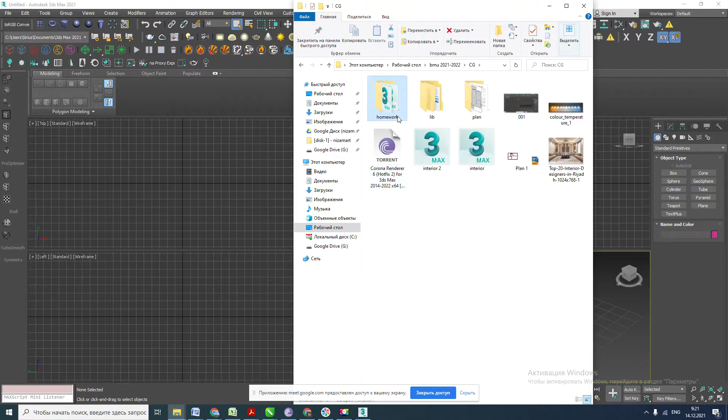Like this, you see, I drag and drop here, and I can open the X-ray. Actually, I never use this one, I use this method. Mesh and X-ray is actually...

I just drag and drop.

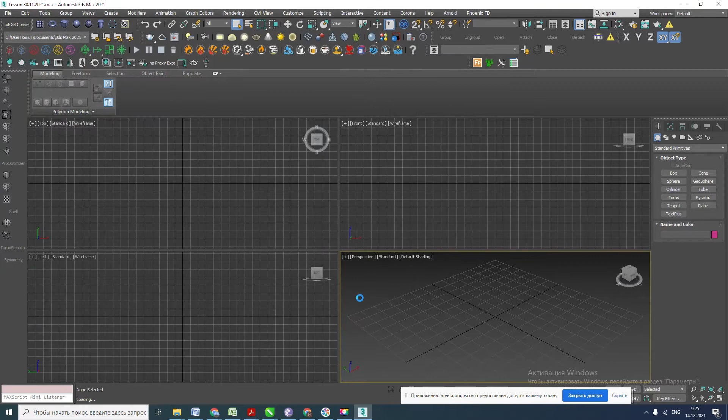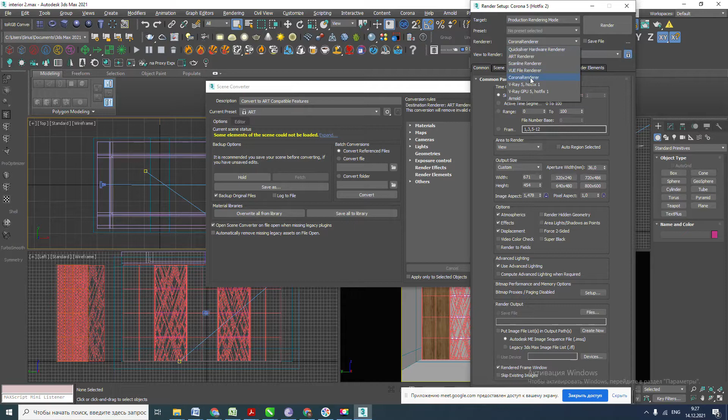You may close this window. What does it want? It wants to convert your materials into ART materials by default. And this item, see, you may convert into another render engines, but I never do it, because if I work with Corona or V-Ray, I don't need to convert.

Let's continue our material. Here's our file, via image. Okay.

What do we do next? What I want to show you is the lighting. Let's take a look at our ceiling. As you see, we have different lighting systems on the ceiling.

Let me show you. First, let's go to Google. I'll show you.

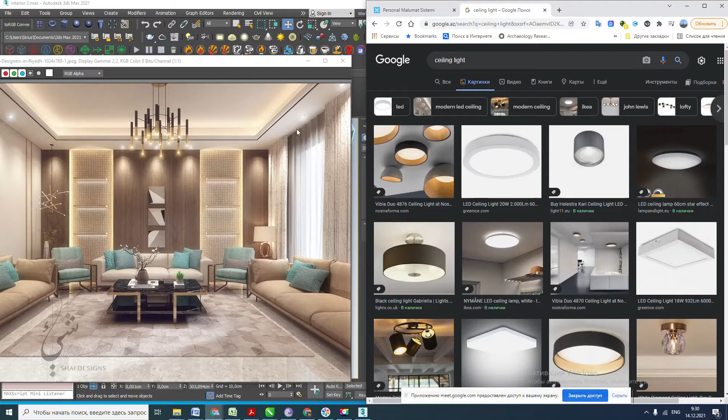You may download spots from the internet or just create for a while, but I always use downloaded spots, downloaded lighting, because if you create something, of course it will work. But if you do a real project, you need to use real objects from real customers. Okay.

As for ceiling lights, we'll create, for example, something like this. You may download it, but I'll show you how to create it. It's very easy actually, nothing so hard to do. You know how to do this.

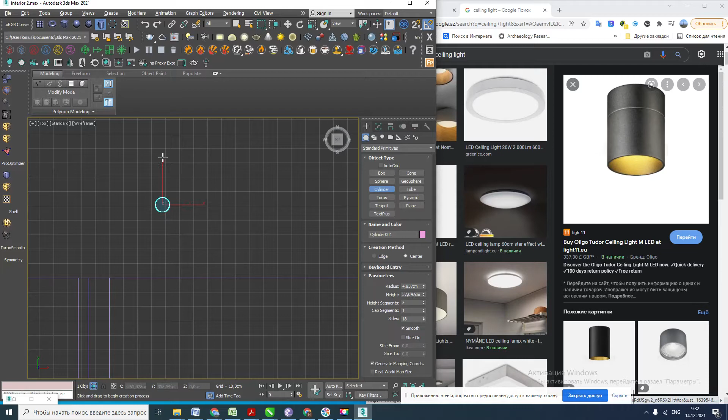It's very easy, you need to go to the tube or to the cylinder. I'll do it using a cylinder. Just create a cylinder.

And if you want to know all you need to do, if you want to know the dimensions — 1.2, the dimensions, the diameter means 6 centimeters, maybe.

Why am I creating the light? Let's imagine that you have some library, for example, from Archimedes. This is the catalog of different objects. For example, you see a lot of objects from Archimedes — electronics, audio video systems, phones, and so on, a lot of things.

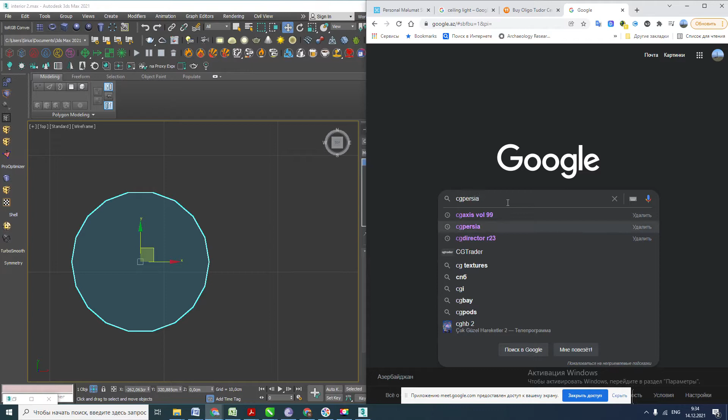I have this collection, for example, like this, so you may download it. And on the other hand, you have collections from, for example, CGAxis. This is also a collection of 3D models, maps, materials, and so on. You may, of course, buy a collection and use it in your projects.

But let's imagine that your customer wants to see, for example, the lighting or some furniture, some detail of his interior, and he wants to buy this light from this site — this company's product, for example — and you don't have any 3D model of this object. It's very expensive, but let's imagine.

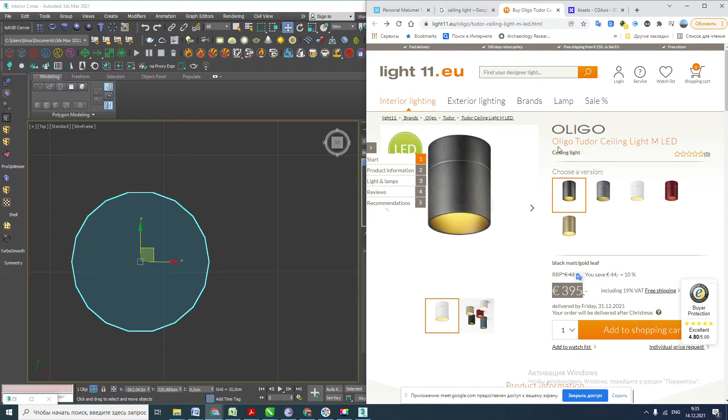What will you do, what do you need to do? Of course, you will need to go to the internet and type this object's name, find his page. Here we have his data sheet. We can take a look. Where is it?

We'll say the same thing, we'll have the descriptions of the model of this object. Here we know it's 1.4, 114, and 6 in radius, diameter 120. Okay, this is our object, and now we can do it.

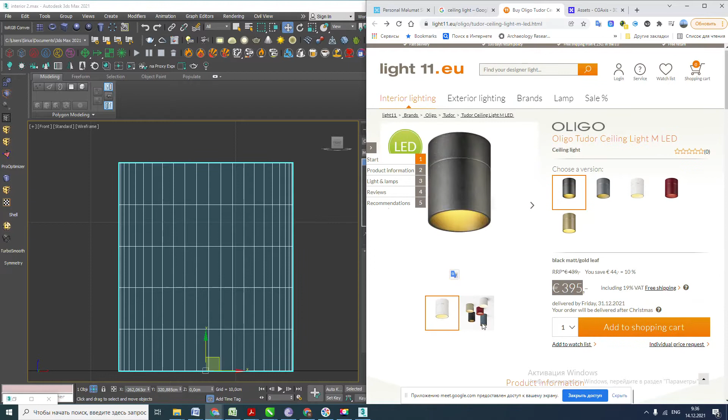We can add some details, for example, how to add this line. And here we have different colors of the light — we'll change it, different properties. How do we do this?

I'll rename this into Oligo Tudor, and I always write here 'spot' or 'light' or something like this to understand where it's situated.

And of course, I'll add it into my new layer. I create a new layer by pressing this tab, or I go to toggle layer explorer. See, this is my spot, this is my object that I created and selected. I can press this button, create new layer, rename it into like this.

Okay, and I'm in the lights layer. Let's go here, the cylinder. We can rename it.

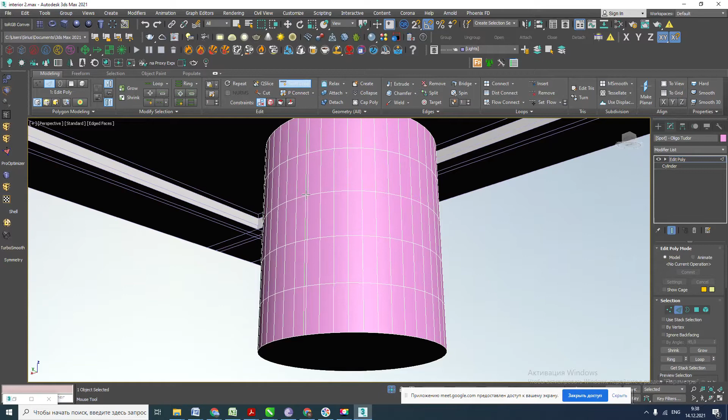No, I don't do it actually. We go to editable poly. Okay, and now I will add some details. What I will do, I need some stripe here. That's why I go to swift loop here, add some loop.

Let's see, let's take a look. Here, somewhere here. Maybe I will go to the vertex one, press 1, go here. That's okay. Now I'll add some details.

I go to polygons, select 2 polygons, two neighbor polygons, and now press loop. Then I go to the inset mode, and just inset a little bit. See,

0.01. Yeah, maybe it's enough. Okay. Yeah.

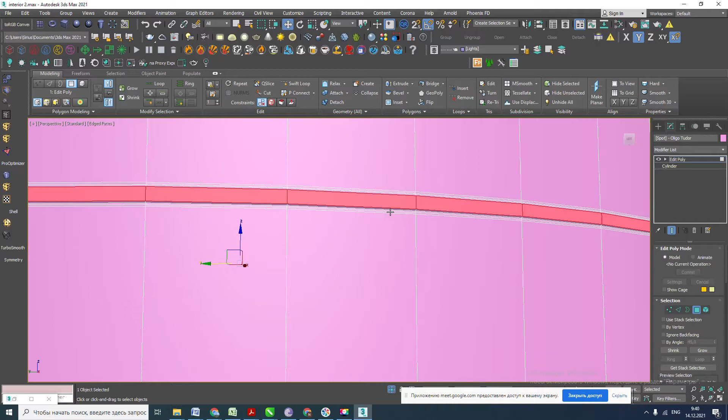Then I'll add a new loop here and here. Then I'll loop again, maybe bevel a little bit. No, opposite side. Okay, and here this I will also bevel to the opposite side with the negative value.

Okay, now I have some striping. As it's in the model, now I need to add some, go to

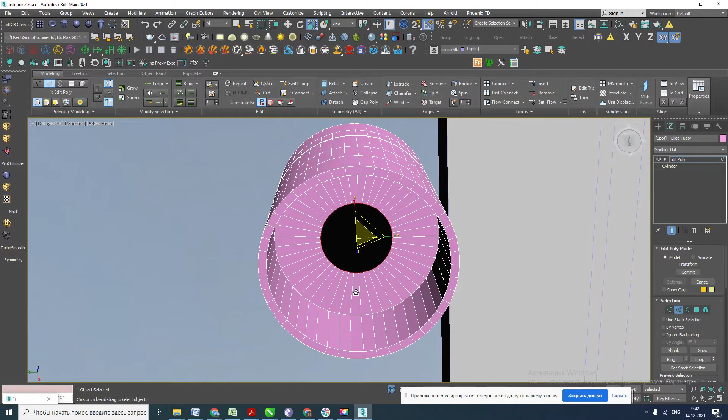Scale mode. Press Shift and drag and drop. I created new. The sides of an object. Maybe it's and that goes to press with Shift. I create this one. Go to Shift. And here you are. Now go here. And also press Shift. Yeah. And I can close with cap. It doesn't work. Wait. Doesn't matter.

Okay, here I will put another object, another detail. But I can do it by selecting. Maybe no, I'll just create a new one, a new cylinder.

And let me show you how to put it into his center, how to put his pivot point into the center of his pivot point. You know, pivot point affects pivot only. His pivot point. Yeah, I centered the object. It has already been centered. Now here, I make sure that it's in the center.

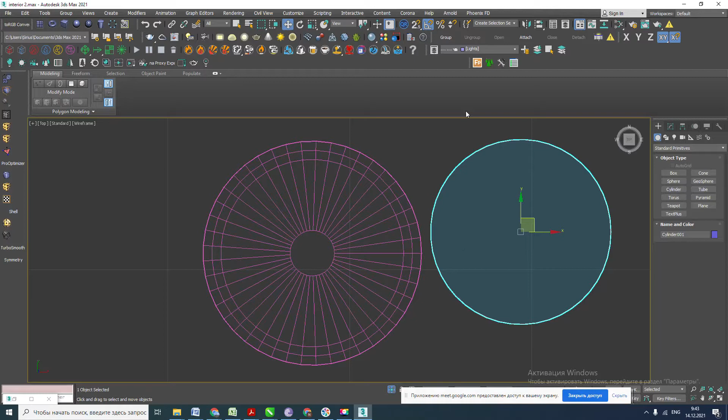Okay, very good. And now I'll go and align by the pivot point. You see how I did it? I select this object, go to align. We have different types, but it doesn't matter for today, for now. I just select this object that I want to be aligned. I go to align and just drag the object into this object and it's aligned into this object, centered into this object.

Okay, now this will be our element. Now I want to show you how it works actually. First, what you can do, let's imagine that this is a glass object, glass surface.

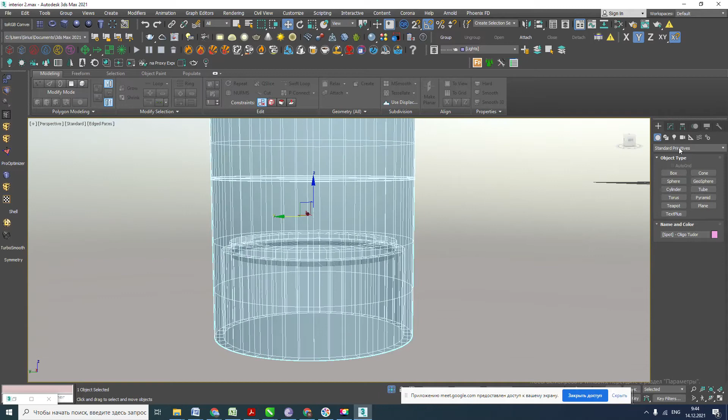Let me delete these points here and just drag out. Let's imagine that we have a glass surface and we have some, let's create corona light, sphere for example. I create a sphere here and put it into somewhere in the center. Let's imagine that we have some light source in the center of this object, and it generates lighting

and go through the glass, and then it works like this. That's the first method how to do your lighting, but I don't use it because the calculation of this may have some time. Why? Because the light goes through the glass and it needs some time to calculate. Nobody uses this method.

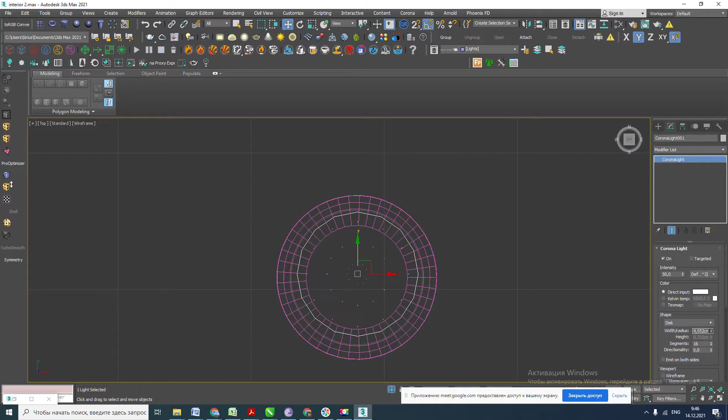That's why I go to the corona light that I created and I change my mode shape into disk. Let's say from the top, and of course I will squeeze size and also align by the center. Yes, I aligned. Okay, and now I just adjust the size.

Maybe I will push up this a little bit higher. This is my glass. This is my light. Okay, and let's go.

And let's go to the parameter to look at the parameters. Here you see 800 lumens intensity. Yeah, because I will change the name of the light. I will just copy Oligo Tudor light, the name of course, and copy it here. And right here. Light source.

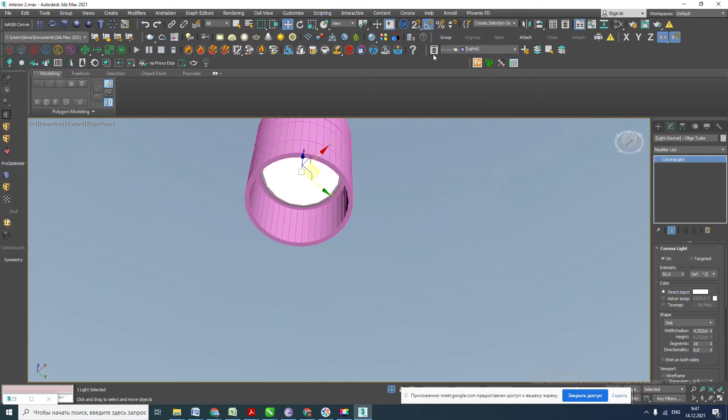I'll rename this cylinder that I created, like a glass surface. Just rename it, Spot to the glass. And I can group it together and call it the group.

Now everything works fine. We have a group of objects and it's fine. You can even add the light source into the group. How to do this? I just select this light source, and group attach to the instance, to the current group.

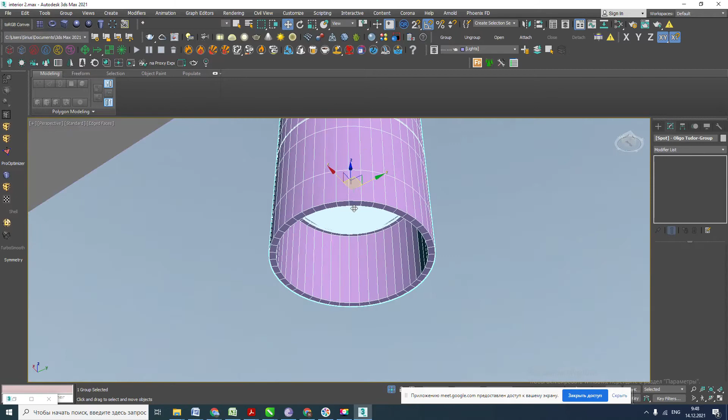And how to work with part of the group? I just open it, not ungroup, just open and select the part of the group and the member that I want to work with. I go to the person, to his parameters, the existing light parameters.

Light flux is 800 lumens. I go here and change the lumens, right here, 800. 800 lumen is approximately equivalent to the luminous flux of a 16 watt bulb. For example, if we go to watts, it will be approximately 16, as was told in the description.

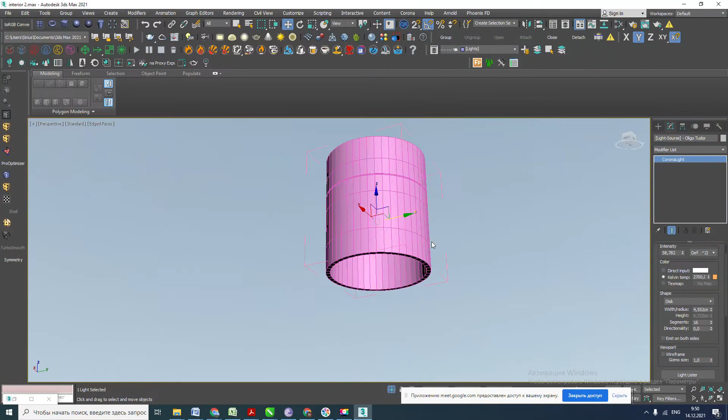Then we need to find the Kelvin, it's 2,400 to 2,700. Where is our Kelvin? Here. Okay, very good.

Now we can close it and put it in his position, where it is - it depends on us. Here we see 3 spots. It depends on our design and our composition.

Now let's have some material. I just open, go to my material editor, material library, I'm sorry.

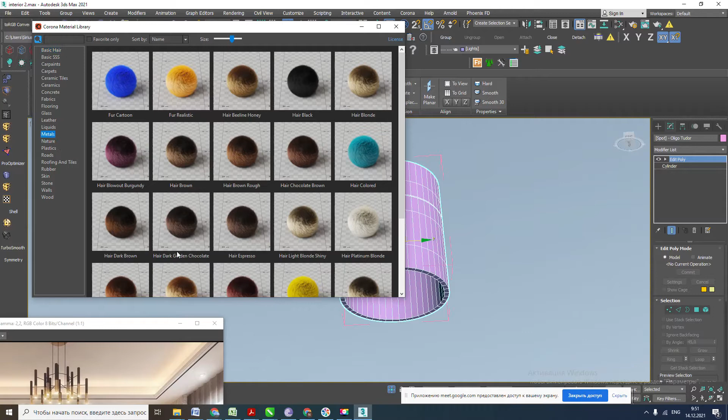Let's take a look, what material is it? White, maybe it's aluminum or some metal, or it is painted metal. Let's go to metal and see aluminum, assign to the model, and here I also will change the material, my glass.

I go to glass material and just select clear glass, assign to select object. Now I can just close. Okay, I created my first object.

And now I need to put it into this position. Where is it? Here we see that they use 3 light sources. It depends on our composition. We can also use 3 or maybe 2.

In this case I don't need a copy because I will not change the copied object. If I need to make changes, I will do it with the object I created the first time. That's why I need to make an instance, and it will save the memory of my computer.

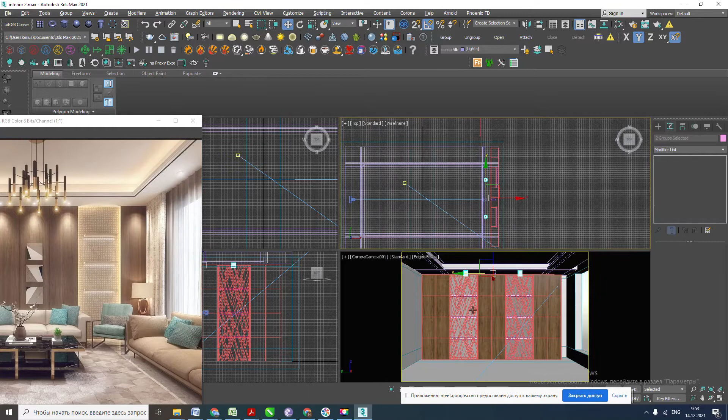Okay, let's do it correctly, and now we can take a look at the result, what happened with our interior using only these two lights. We'll save it, and go to the render panel and start to render.

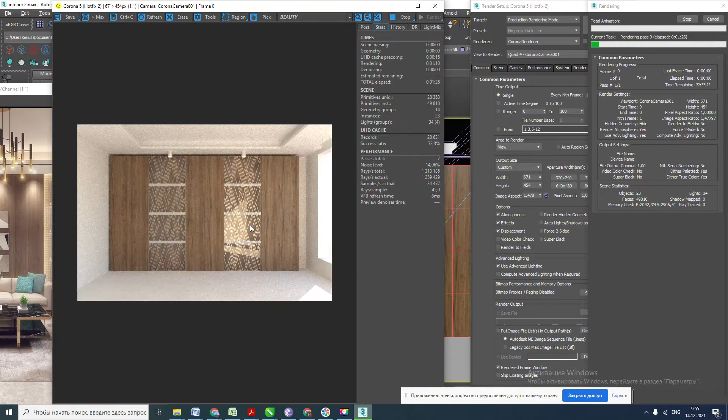As you see, ladies and gentlemen, it works. But of course, the daylight from the sun is overlapping the light that we have in the spot. Let's stop it and let's turn the light source.

Let's do it like an evening light, an evening sun. You can just start interactive render. Now we can notice that it works. Just turn the noise off.

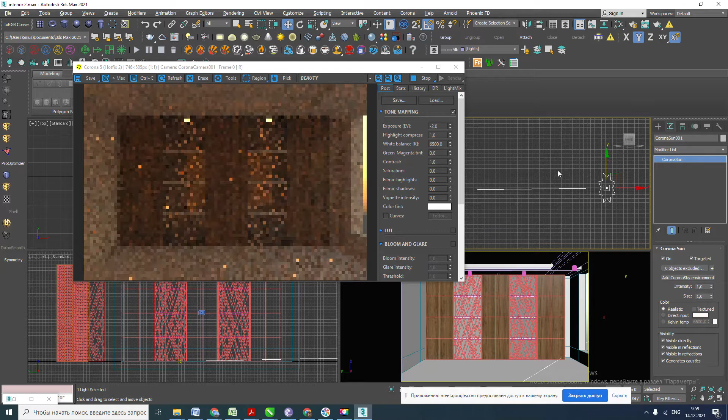But if I just copy here, instance and instance somewhere, on the walls here and also here, put it to the center, copy it also here. Now I can notice that my scene became brighter, and if I even change the parameter of the sun, it depends on the angle of the sun. We have a very beautiful evening, and these lights are very weak.

If we go to degree 0, we see that they are working. I turn off the sun and it works. You see?

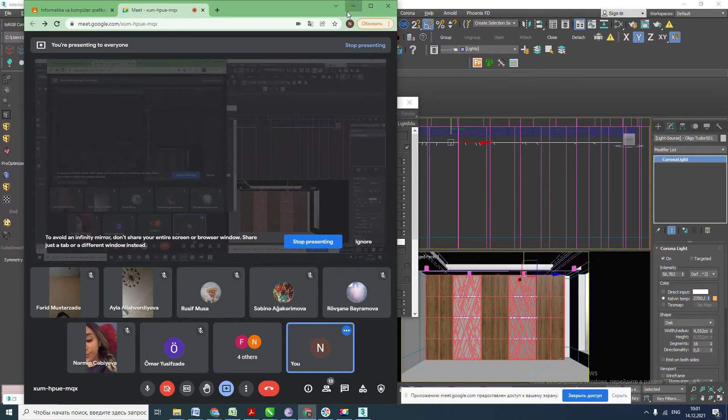Let's see, the system is loading because I'm rendering right now. I go to the dispatch - this is the task manager. As you see, I have a lot of windows open in Chrome. I have Corel with hard files open, and also torrent, and I'm recording right now, also 3ds Max.

As you see, it's almost full. Okay, let's stop it and go to the other light, ceiling mounted ceiling light, LED.

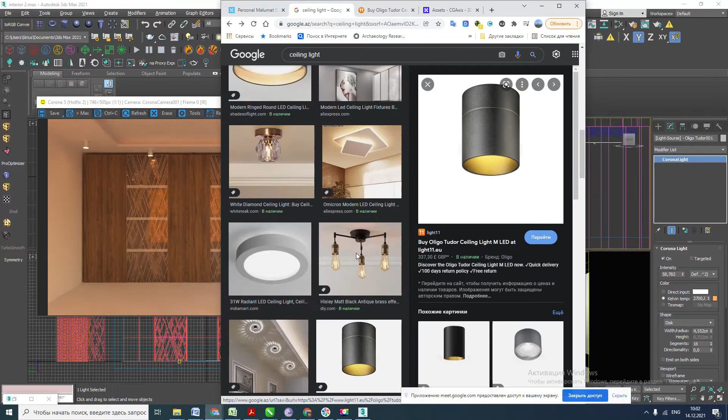Okay, we already did this, sorry, I forgot about this. Oligo, we use this light. Okay, if you see that you have very...

Let's say warm colors, very yellowish colors, you can change the white balance, for example, to 4,500, and you will get much more cold colors. See, that's much more interesting.

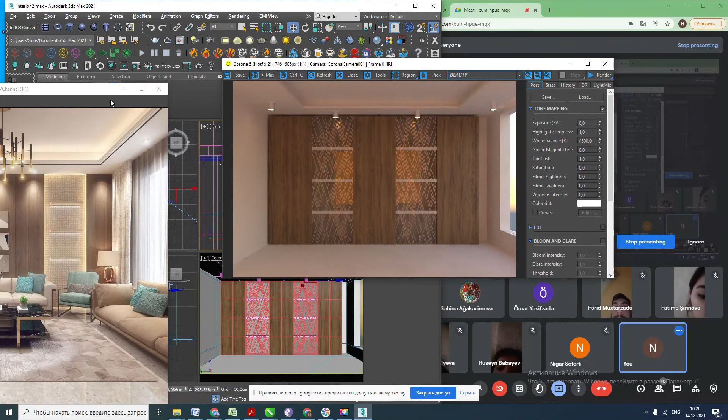Okay, we created the light sources. Now let's talk about the hidden light. You see, we have a hidden light here. Also here, I can show you. Here we have a hidden light. Okay, you see a hidden light.

Also used not only on the ceilings. And if we go to hidden light properties, for example...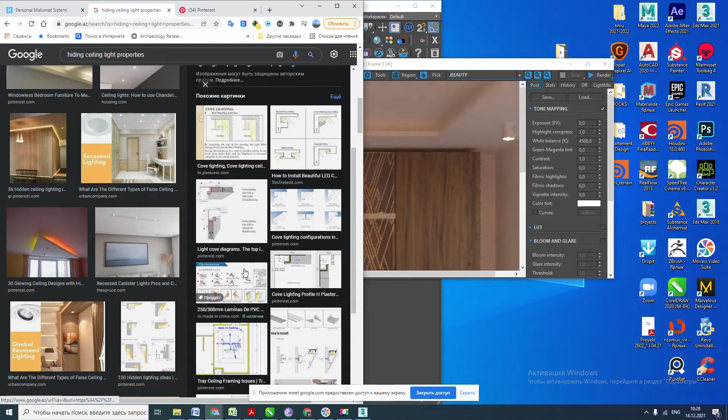That's what you see. First, we can put LED light here. Actually, just a moment, let me show you LED lights. Hidden light, ceiling light, properties, LED light.

Actually, yeah, something like this. You see, we have a LED. Let me show you like this. Okay, yeah, something like this. We have a stripe with LED light, and it's been put here or here in a different position. In our case, we can put it either here or here. Okay, let's see.

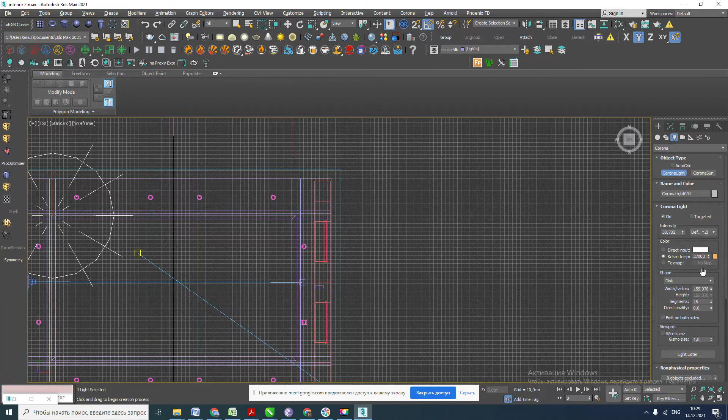What I will do? We have different ways to do this. The first is just create light, Corona light, and just create. Oops, we are in this shape. I will change it to rectangle. Create it again. Okay, I created the light.

Okay, go to the perspective view, and maybe I'll select both the light and the ceiling, and just isolate by isolate selection, or Alt Q. Okay, I isolated the selection.

Okay, I put it here. Now I need to correct it. I need to get some corrections. The width will be 5 centimeters, or you can go and check parameters.

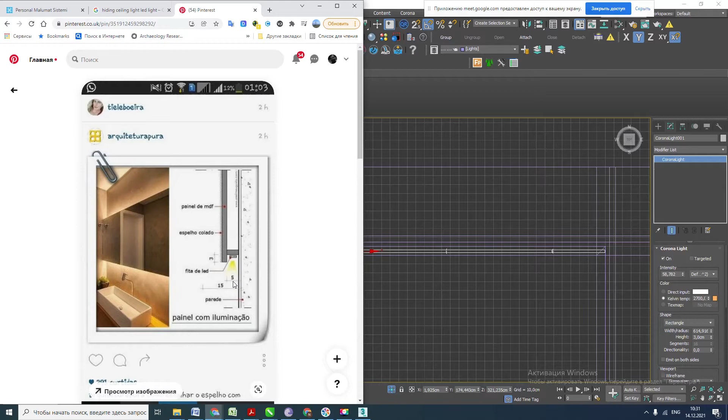Okay, now we put it either like rotated. Okay, I can put it like this. Yeah, like in ours. You see, I put it here on a corner, or here on this wall. But I will do it like this.

Okay, what about the length? It's okay, it's up to our tray, maybe 620. Yeah, good. So I'll copy it, now I instance it. Okay, let's rename, let's write...

Fake light or hidden light, hidden light ceiling, and now here I will add just like in brackets, rectangular brackets. I usually write some category, like I create a folder, then the name of a file. Let's imagine like this. Okay, hidden light ceiling.

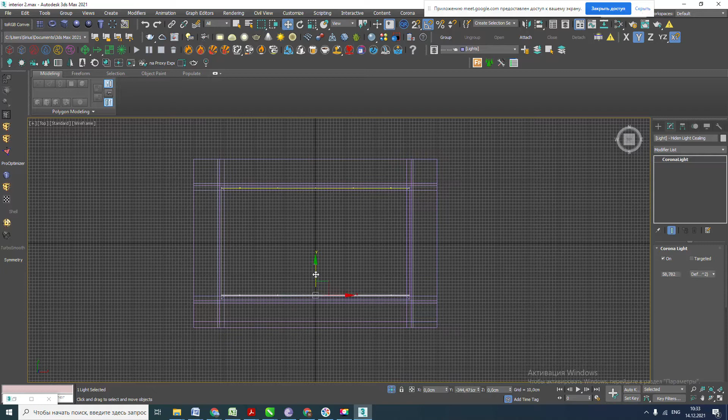Then I copy it here, instance, and now hidden light 001, maybe, could be. Now let me make sure that it's the correct position. Now I go to the top view and I copy it, copy the instance, and I rotate it and put it into this position, and of course I will go to select and uniform scale.

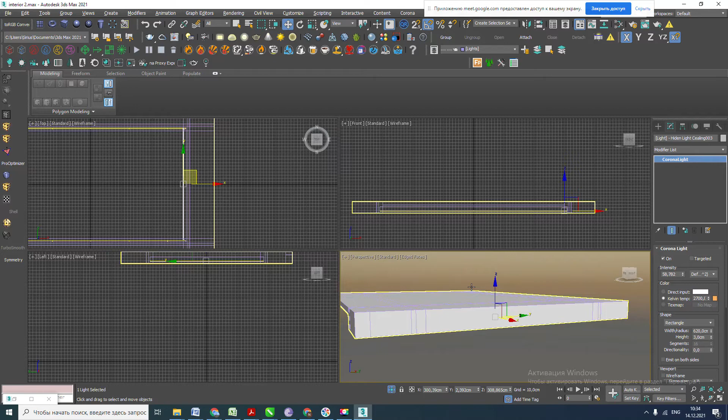I'll change its sizes. Okay, I can do it here, but I just scaled it. Make sure that it's in the correct position. Also, I copied instances there. Why do I instance it? Because if I change a parameter of one of them, the other will change automatically.

And let's select our lights and put them on a surface, very close to the surface. Okay, now I can change the intensity of my light. It's 58. If you don't know, you can go and check LED light parameters, and you will see the intensity of LED light, for example.

What is this? No. One candle, and we will find somewhere. Actually, it doesn't matter, we can find it anywhere we want. Yeah, for example, different types, for around 4000 Kelvin, that's right here.

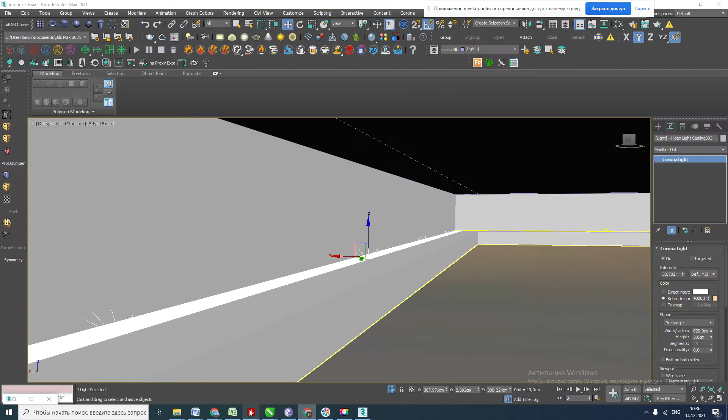In our photo reference, we have something like 3000, maybe 3.5. The spots are cold, the light from the spots is cold. The light from the ceiling is warm, but it doesn't matter for this experiment because we choose Corona light. Okay, and what about the intensity?

Yeah, I will copy it. I'll save it for you.

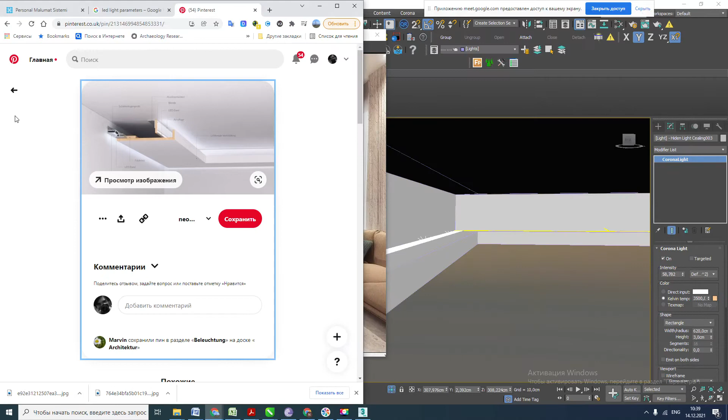Okay, let's take a look what happens with our render if we render.

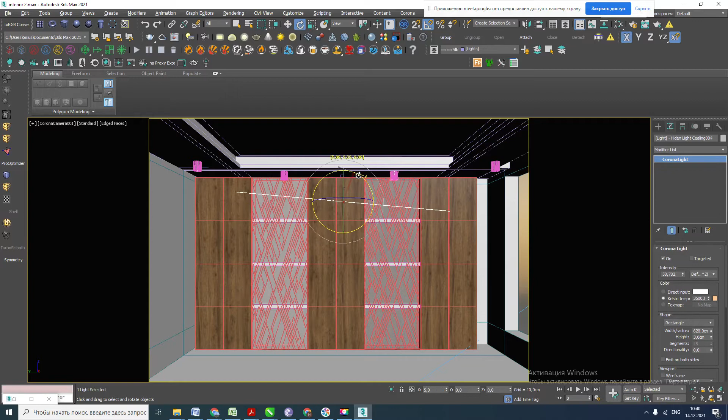In our photo reference, we have light here and here. Let's create a linear light also. I copy it here and I will put it into this tray. Do you remember we created the trays here for our lighting?

I put it here, let me isolate the object. I put the lighting here. Of course I'll change the sizes. If I change the sizes from here, the sizes of other light on our ceiling will be changed too. That's why I just change the form, I rescale it.

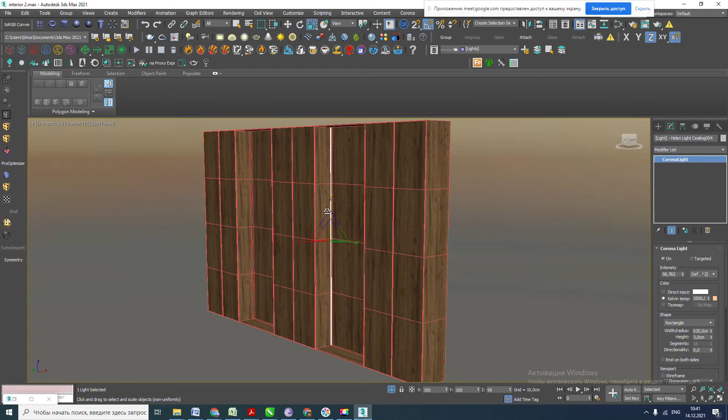Okay. I can put some glass material, but I don't need it.

I can group it. Group 1. Select group 2, the second group. Okay, very good, you can close it. And let's take a look, let's take a look at the results.

I save it and just press render. Let's stop it because I want to increase the resolution, it's very low now.

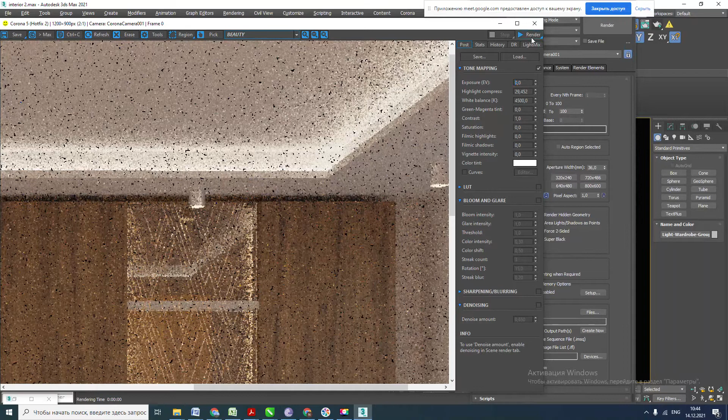And in my opinion, of course, the LED lights must be less intense than the spotlights.

Yeah, how to find light here? I don't see the light source, how I can get it from this scene or from everywhere. I mean, I can choose some category in this toolbar next to box selection and so on. In this toolbar, I have some categories.

For example, if 'all' is pressed, it means I can select all types of objects into this mask. If I go to geometry, it means I can select only geometry. If it's lights, it means I can select only lights. You see, I cannot select anything except light sources. Here I remember that I have a light source, that's why I'll select a light source here.

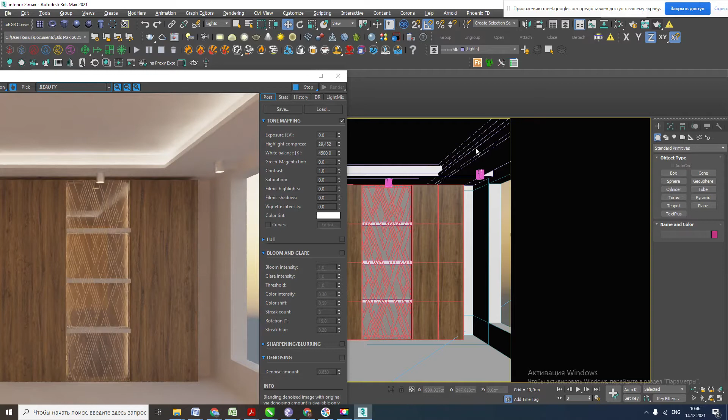See? I selected just the light source. Okay, now I will change the intensity.

Maybe it's... let's change the intensity. No, it's very low. Also here. Actually, it's very low intensity.

Let's change it into 2500 maybe, for this case. And maybe also we'll change some parameter, intensity.

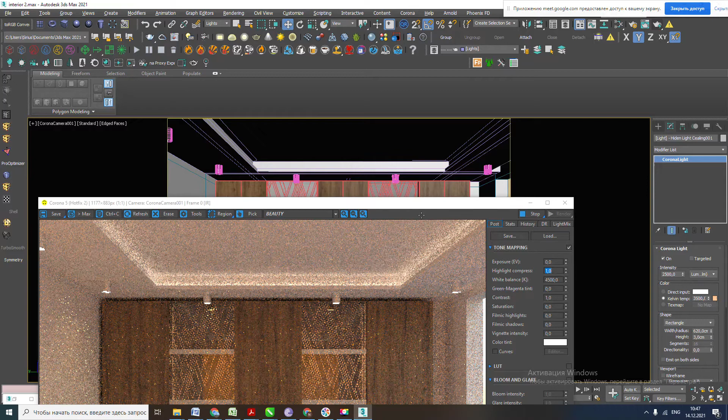Okay, let me show you another tip and trick about the light. When I select a spotlight, a corona light - in our case it's corona light, disc light, it could be sphere and so on, it doesn't matter actually - we see an IES file here, IES parameter.

What is IES? Let me show you. IES light, it's something like fake light with a beautiful shape on walls. The IES lights are generated by a system of the render engine and can make some shapes. In our case, we can see that the light was generated by the source, but now we can put our IES by ourselves.

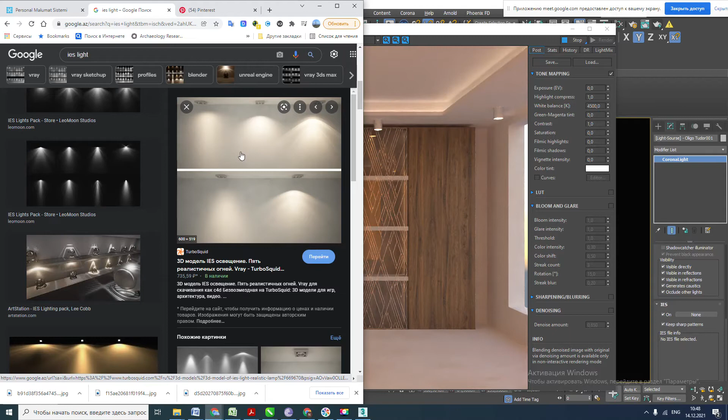I mean, we can change - we can change the shape of the light. Okay, let's go here and download. There are a lot of free downloads.

Okay, let's see, let's take a look. Let's extract it here.

This is our IES light pack. We cannot see anything, but if we watch our pages, we'll see different shapes. For example, in our case, it will be jellyfish. Let's choose something, for example, jellyfish.

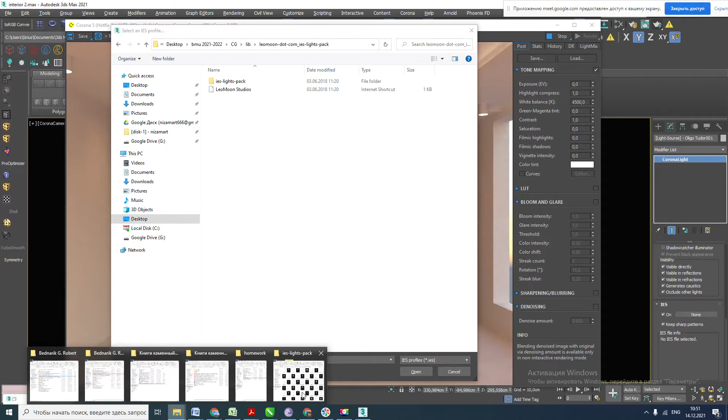We're choosing that it's jellyfish, or what is this? Yeah, jellyfish. Okay, that's open. Now we can notice that the light is changed. It became more intense.

And we have a shape. If you want to look at this more correctly, we need to decrease the direction, the power, for example, to 5000. You see, we have shape.

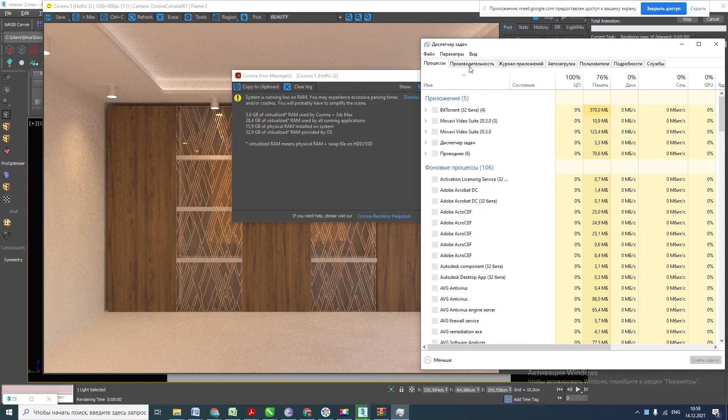First, I want to show you a different thing. You see the Corona error message. It means that you need some virtual memory, some RAM, and I don't have enough in my computer for rendering this image, because I said a lot of programs are opened. That's why it took some virtual RAM from my SSD drive. See, he gave a couple of gigabytes to my system, and he took, for example, 16 gigabytes of physical RAM instead, installed on the system.

That's my 16. You need 28 virtualized, used by all running applications. As you see, I need 28.4 gigabytes of RAM to run all my applications right now.

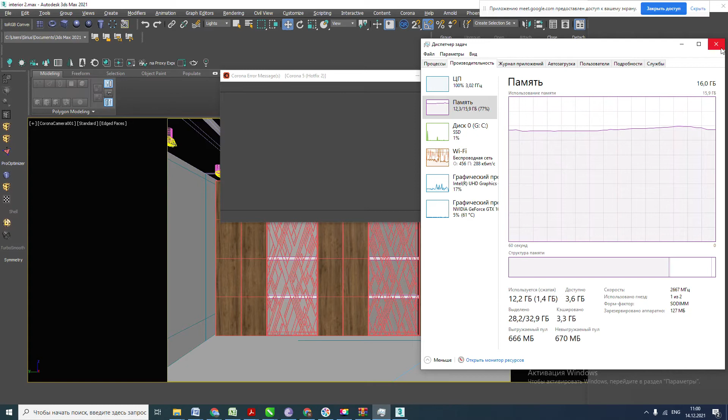There are different ones: Google Chrome, I don't know, Word documents, Excel documents, CorelDraw, I don't know, torrent application, rendering this scene, 3ds Max scene, recording our video. All these applications need some memory. See, that's why it needs to get some memory from my disk.

Okay, let's stop the rendering. Let's put my render.

For some applications.

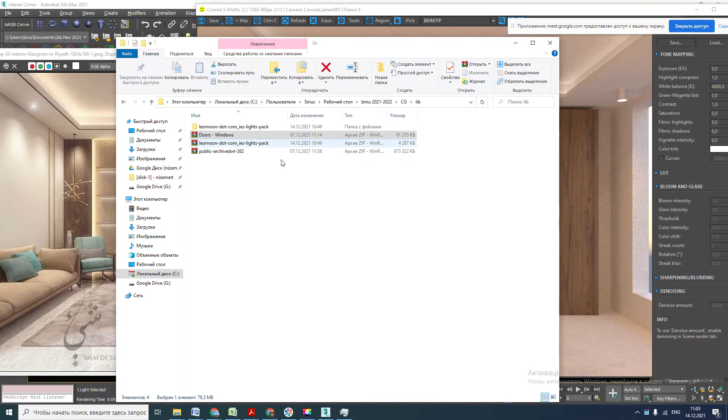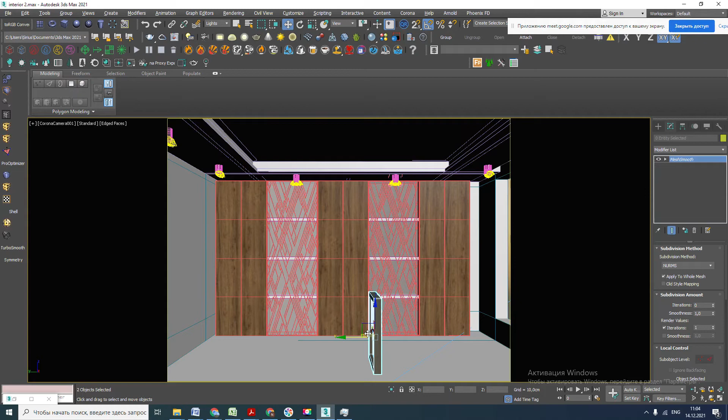Okay, let me close this one, close, and begin to merge, or file merge, or just drag and merge. What is this? Let's see. Of course, scene converter, because this is in a different render engine type. This is our window number 1.

Okay, let's take a look at window number 2. Yeah, when you import this, always group it, because maybe it consists of different parts. That's why you need to group window 1. Okay, now I want to create some layer for the windows.

Windows. Okay, good. And now, why can't I select an object? Who can say? Why can't I select the objects?

Nobody listened to me, but it doesn't matter. Why can't I select? Because I'm in light mode. That's why I want to go to geometry mode or just all mode. Then I can select this.

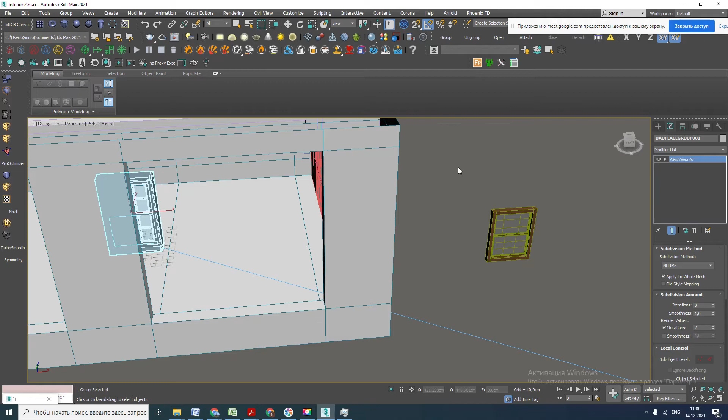Also, before doing something, I need to group it into a window and rename it window 2. Okay, and now I can drag and drop and take a look.

Let's look at the third. Merge. Okay, and now group window 3. Now I think this window is not so good. I'll delete it. Maybe I'll use this window, or maybe this one. Okay, let's use this window.

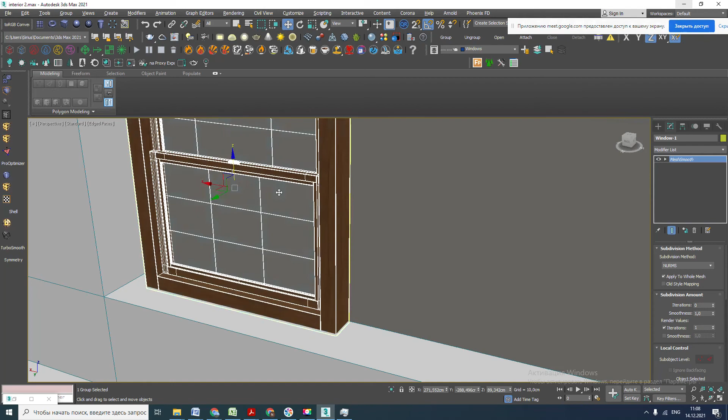Or maybe we'll use this one. Yeah, we can use this one. Inner side. Yeah, okay good. Very well detailed. I'll put it in its position correctly.

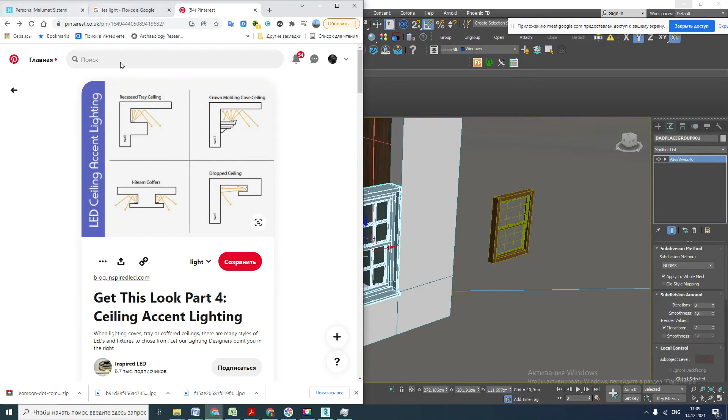Not so good in our case. Now I don't like either of them. Okay, it doesn't matter, you can download another window. For example, go to Windows 3D model.

Let's take a look at the models. Premium, you cannot download it for free, don't need it. Go to the TurboSquid free models. The first model maybe, let's download. Cool, maybe it could be ultimate.

Okay, it's right here, window. $35, 3D model. Price free. Maybe this one or this one. It's $35. Okay, of course it's the free model, it's not so good quality.

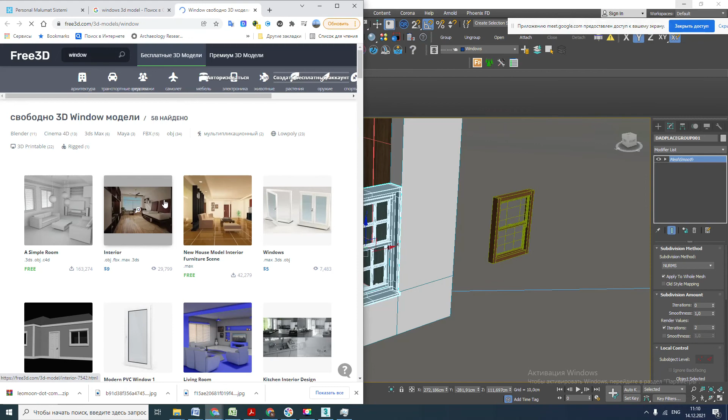Actually, I have a big collection of windows, but I just don't want to spare my time to get all this stuff. Let's go.

Okay, for example, this is the same collection that we downloaded, and it doesn't work. I mean, we only have 3 models here. What's going on?

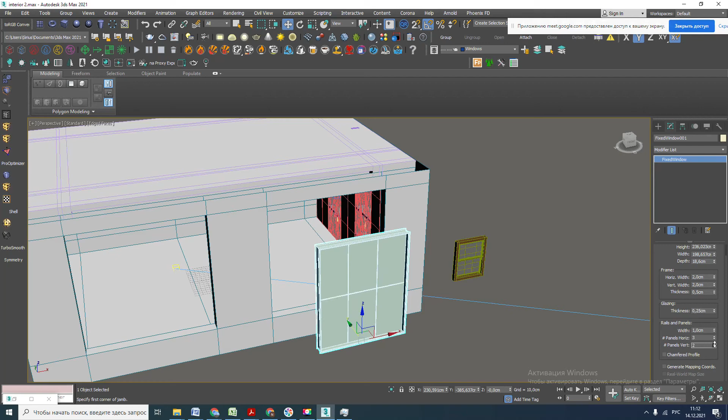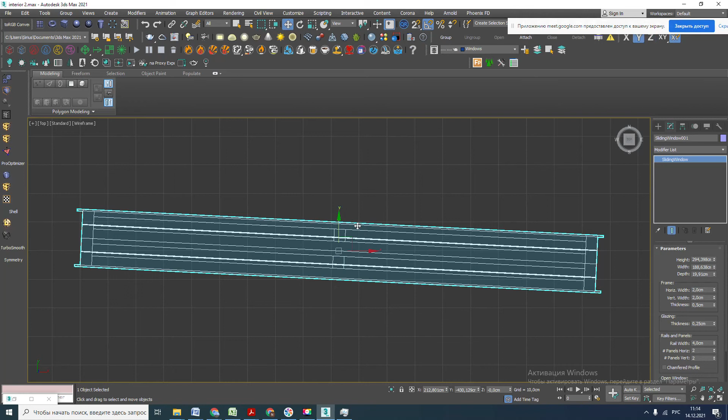I don't like those windows, but sliding windows you can use. Make it up like this. Okay. Maybe it could be, why not? And the sizes.

Of course in our case it's not correct, but it could be, why not. We are not in the interior design course, we are in the computer graphics course. I want to show you what you can do using 3ds Max.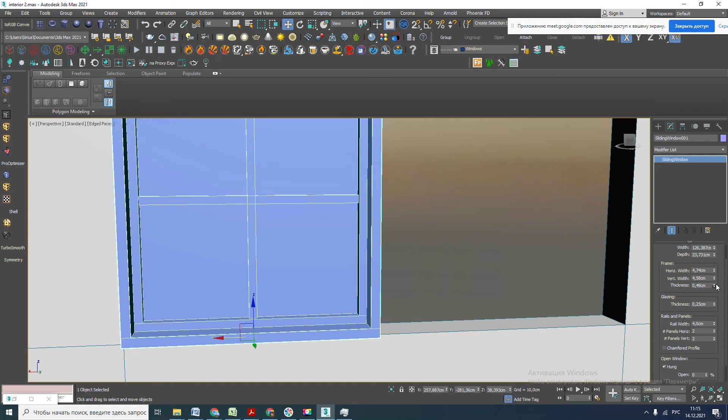Okay, for example, the first one, may change the parameters, thicknesses, so we can extend the panels. For example,

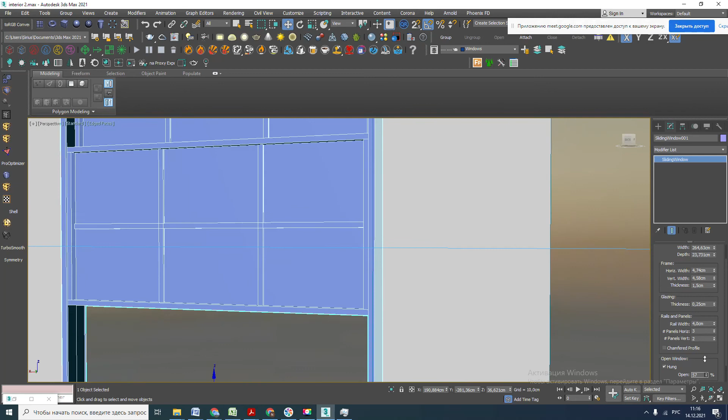Yep. We need to rotate it. Maybe yes, maybe no, but it depends on your wish. Maybe like this. No, like this.

And now, after creating, maybe we'll... okay, maybe like this. We can change the parameters, I mean the material window. I go to edit mesh,

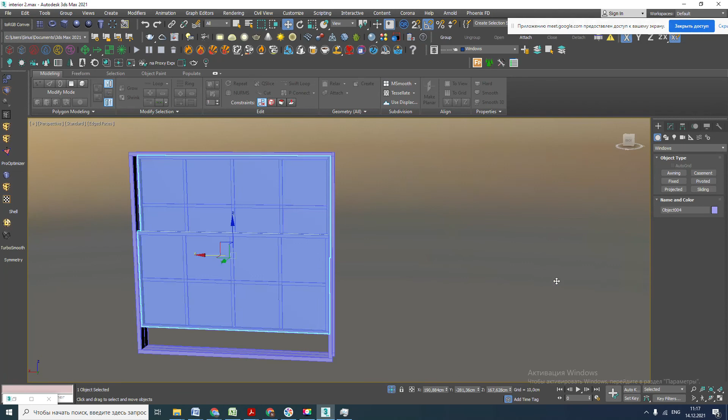converted to poly, and now I will change the parameter of the glass. I select the glass and the material and detach it, not as clone, just detach, because I need this as glass. Okay, then I go to my panel, material editor, and just assign a clean glass.

Now I need to change the whole window. Now here I go to parameters, go to wood for example, and I'll assign this material. Okay, wait a little bit. Okay, that's my material.

Now I also need to add UVW map coordinates with box, and just change it to 1,1,1. Okay, and it works as I want.

Now I just group it into window one, maybe, yeah. Oh, window wall, and put it into this layer. Window wall 1, first, window wall second, 002. Okay.

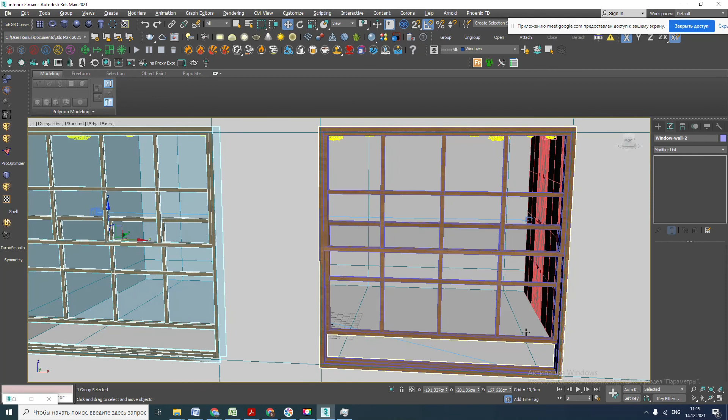Okay, let's take a look what's going on, what's happening with our file. Now we have 2 windows. Let's begin, this became much more interesting. And just render.

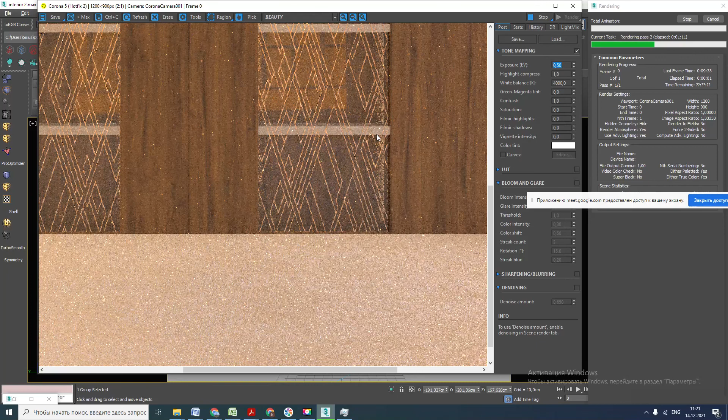Of course, ladies and gentlemen, in my opinion it's a very terrible interior design, but my aim is to show you how 3ds Max works. Understand how to fix problems, how to find solutions, issues and so on. Our course is not for interior design.

Do you have any questions?